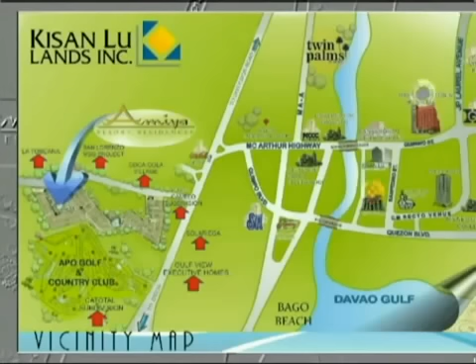This modern Asian, specifically a Thai-themed community, is only a 20-minute ride from the downtown area. This is almost in front of other subdivisions and near commercial establishments like Davao City Hall, health center, public and private schools, public market, malls, beach resort, and of course, the Apo Golf and Country Club.

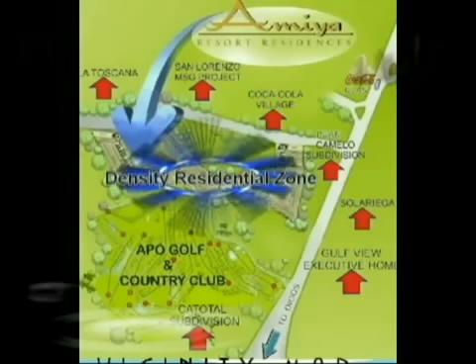Study shows that this property is classified as a protected low-density residential zone and shall be used principally for housing purposes, with a dwelling density of 20 units per hectare, provided with primary and secondary wastewater treatment facility.

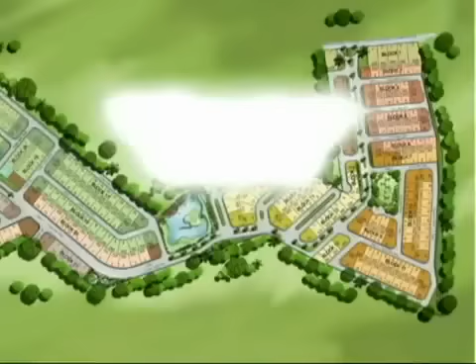Amiya Resort Residences offers open lots with a minimum lot area of 200 square meters, a total of 455 saleable lots, which is 52.88% of the total project area of 239,086 square meters. Reserved an area of 12,280 square meters easement for future use.

For the utilities, the Davao City Water District has certified the company, showing their support for the subdivision's water supply, as well as the Davao Light and Power Company for electrical supply.

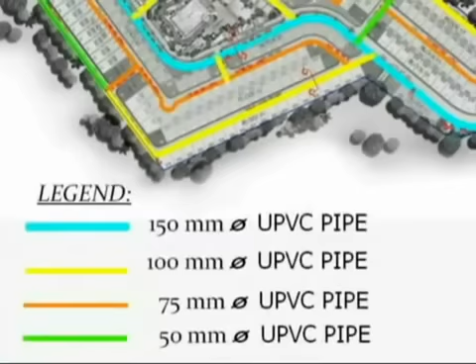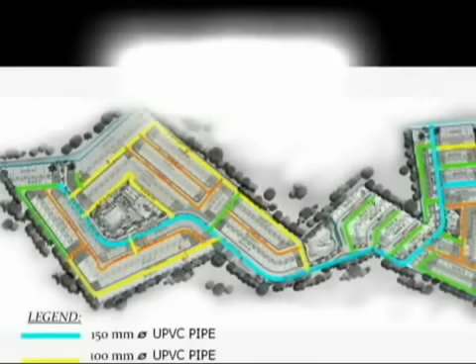Water supply by DCWD will be channeled through the water line system using 150 mm diameter UPVC pipe as main line and 100 mm diameter to 50 mm diameter UPVC pipe as tributary lines. Water distribution layout plan is based on the minimum standard set by the Davao City Water District and/or the local water utility administration.

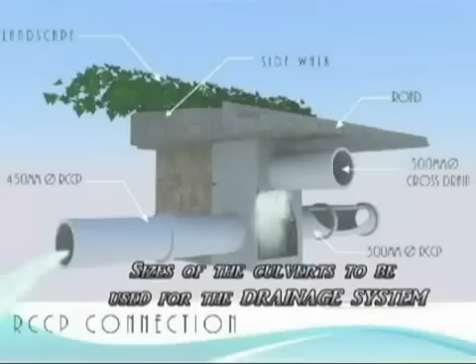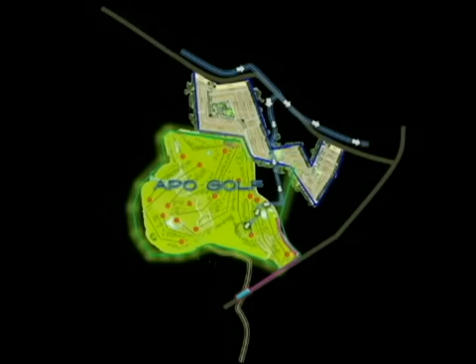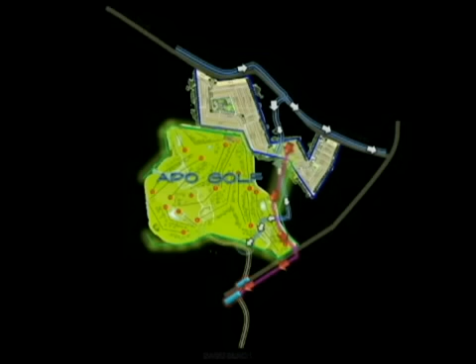There is an existing natural waterway that traverses the property. It passes through Apo Golf and Country Club and eventually to the ultimate outfall, which is the Bago Creek. The company proposes to divert its storm and drainage system, or 44% of the water flow, within the drainage catchment area to the existing 48-inch culvert of the DPWH.

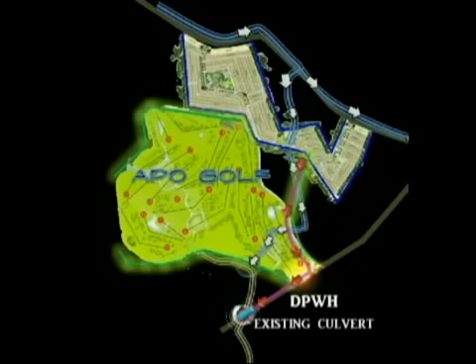We will install a 48-inch culvert on the boundaries of the property of Apo Golf and Country Club, along the prevailing road of Apo Golf and Country Club, and eventually tapping it to the city's existing 48-inch culvert along the National Highway. The existing 48-inch culvert of the DPWH will ultimately fall to Bago Creek.

Permit to tap the 48-inch existing drainage line along MacArthur Highway has already been secured by the DPWH with the approval of the City Engineer's Office.

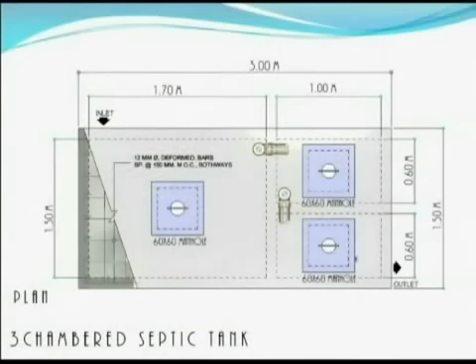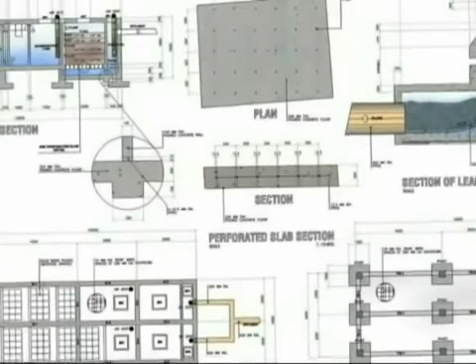The Department of Health has released an initial sanitary permit to the company for the construction of a public sewerage treatment facility. We have reinforced concrete septic tanks, bottom sealed and waterproofed to prevent seepage and leaks, and to ensure non-contamination. The project proposed 2 units of wastewater treatment facility.

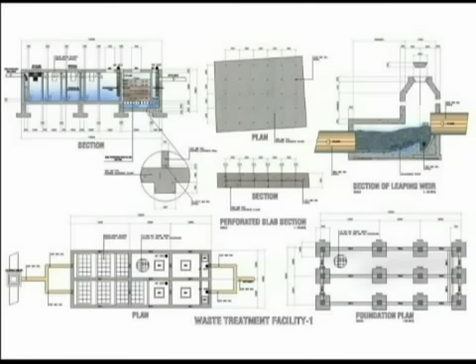The wastewater treatment facility, or specifically the anaerobic baffled reactor treatment facility, is a multi-chamber tank that holds the process of removing contaminants from the pre-treated influent. Its objective is to produce a waste stream and solid waste or sludge suitable for discharge.

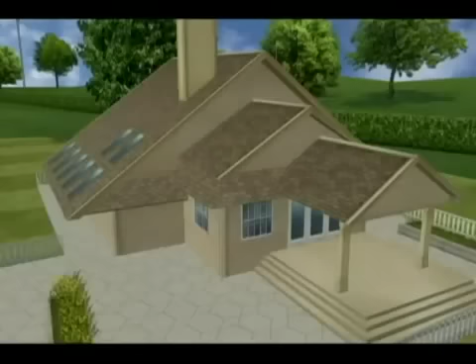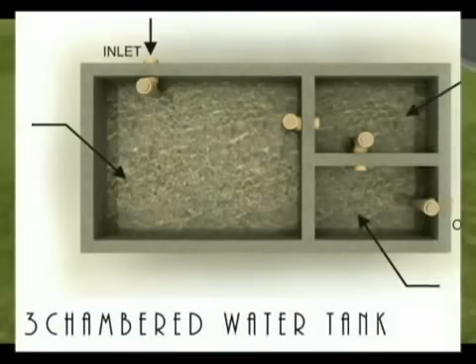The process. First, the domestic sewage or wastewater coming from the household will be received by a 3-chambered septic tank. Second, the sewage will enter the main chamber of the digestive chamber. Due to the absence of a current, the sludge quickly settles down to the floor of the digestive chamber. Anaerobic bacterial digestive activity leads to the generation of methane and carbon dioxide, which stabilizes the sludge so it does not rot anymore.

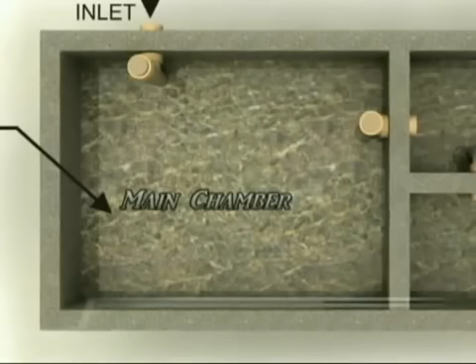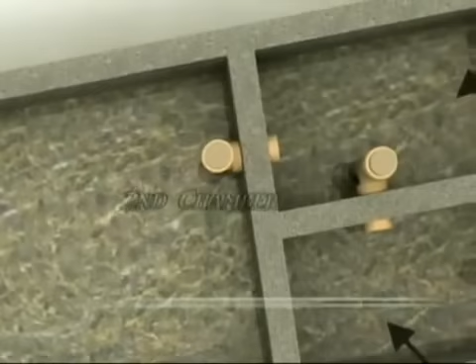Third, the semi-purified water moves to the second chamber via the overflows that are constructed such that the upward motion of water prevents larger particles from flowing into the second chamber. The feeding, digestion, and settlement of organic matter continues in the second chamber.

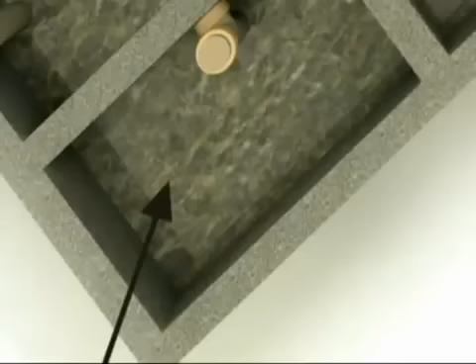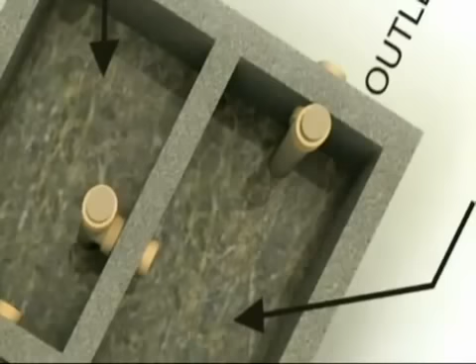Fourth, the water comes into the third chamber, where the feeding, digestion, and settlement of the organic matter, if it still exists, will continue. And finally, the clear water coming out from the 3-chambered septic tank is channeled to the wastewater treatment facilities through drainage pipes and manholes.

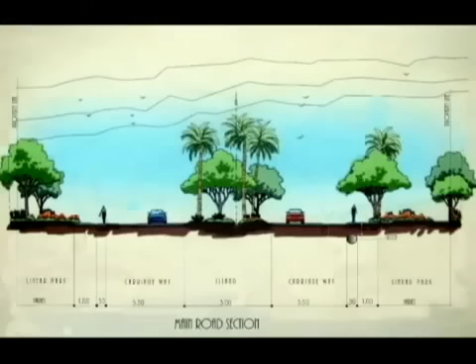All roads will be composed of load-bearing concrete with a 3,000 pounds per square inch strength and 6 inches or 15 centimeters thickness. 12-meter wide road right-of-way for the main road and 10-meter wide for all auxiliary roads.

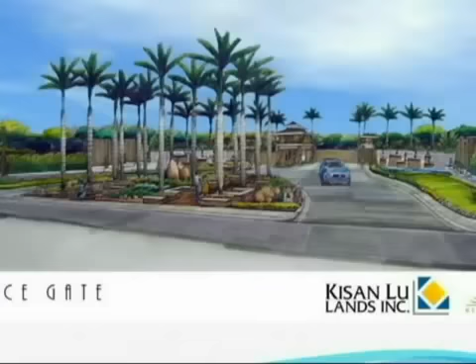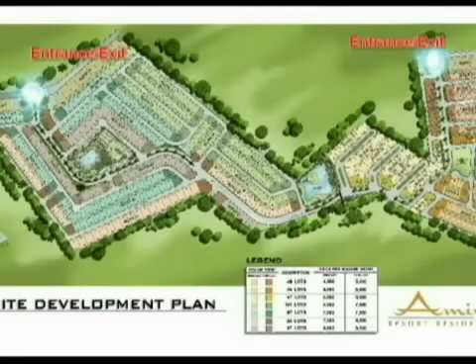The grand entrance will have a 50-meter wide opening with an easement of 27.5 meters from the Libby Road. There will be 2 access points to which 2 main gates will be constructed, intended for the entrance and exit ways. Both of these gates are located along Libby Road. The main entrance will be gated and will serve as the welcome landmark for the subdivision.

The guardhouse will regularly have a guard on duty who will control the entry to and egress from the subdivision. The grand entrance will adapt the modern Asian Thai theme to consistently express the motif and ambiance of the subdivision. The subdivision's name and logo will be reflected along the landscaped area. Heavy landscaping will be done in consistency with the theme and to promote a green environment.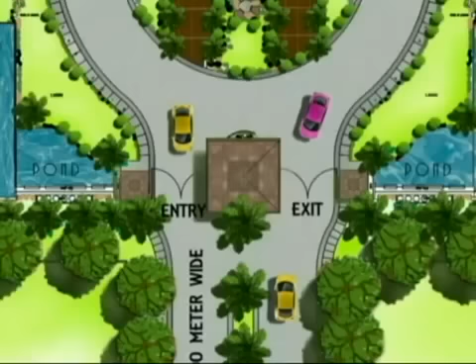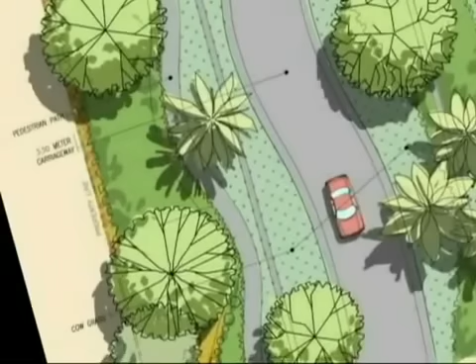It is a 17-meter wide main road. Along the main road is a 3-meter island and 1-meter sidewalks. The island will be landscaped and planted with trees. There will also be a 4-meter wide linear park beside the main road to reflect the concept of a resort feeling and cool ambiance and to promote greeneries.

The children's playground will have an area of approximately 1,000 square meters and consists of recreational and educational fixtures. It also has a wide activity area for the children. The area will be fully landscaped with trees to reflect a cool, serene, and relaxed environment.

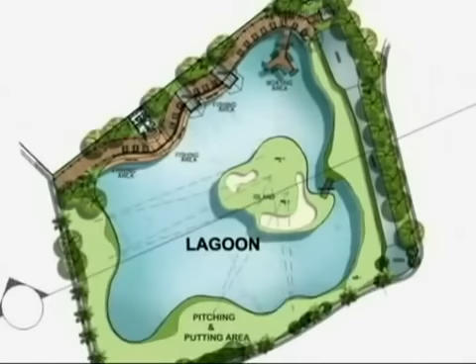The pond will be lined with the latest innovation to ensure non-seepage: the clay liner, better known as the Enviromat Geosynthetic Clay Liner. A 5,000 square meter fully landscaped area with huts, pond, and an island. The area will be abundantly planted with trees. The pond has an approximate measure of 3,500 square meters and has a depth of 1.2 meters to ensure the safety of the children.

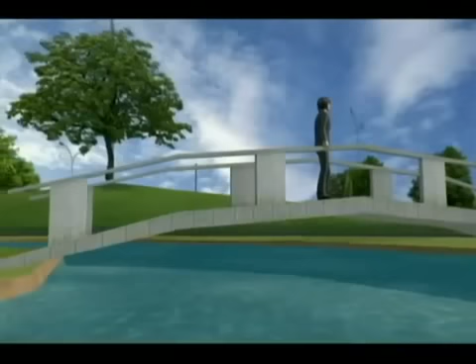An island will be built within the pond for pitching and putting. A bridge will also be put up. The area will be landscaped and specially designed for meditation, which will serve as the perfect place to relax, unwind, and restore the balance of body and mind.

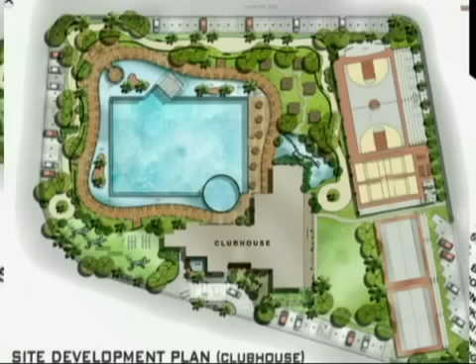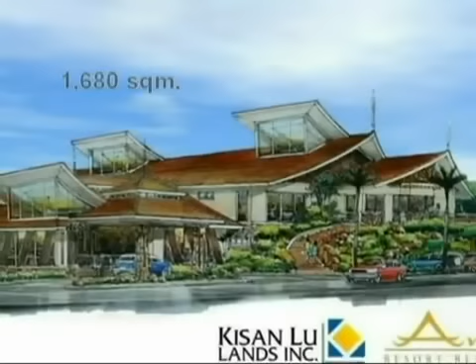This is going to be a 1.1 hectare area consisting of the main clubhouse, swimming pool, basketball court, badminton courts, tennis courts, gym, spa, casitas, restaurants, and a jogging path. The main clubhouse building has a total area of 1,680 square meters. The main clubhouse will also be inspired by the modern Asian theme, which is mainly composed of masonry with a touch of natural woods as accent.

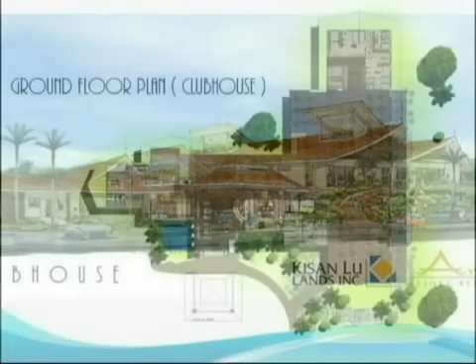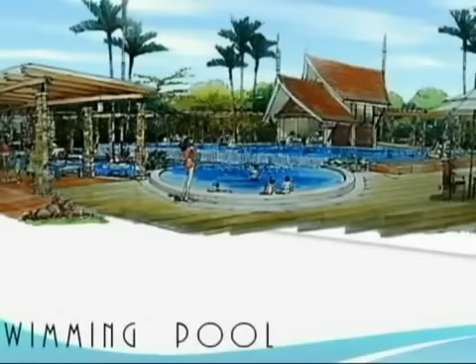The building will have a fitness gym and spa, game room, 2 function halls to hold special events, administration's office, a lobby, dining hall, and a kitchen. This swimming pool is salt chlorinated to protect the skin, measuring 1,500 square meters. It is surrounded by a pond, thus effecting infinity or a continuous visual effect to the pond. This is also called negative-edged or infinity-edged.

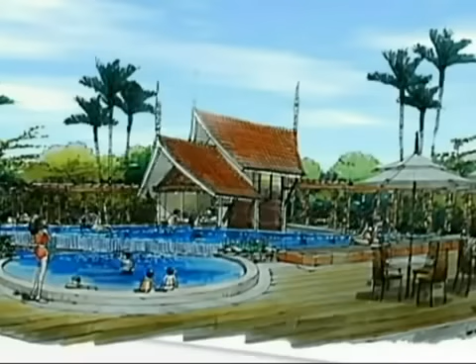A kiddie pool for children will be constructed beside the swimming pool. A view deck with trellis will surround the pool to serve as a shade for the swimmers. The pool will also feature a sunken bar. There will be pool pumps, shower and dressing rooms conveniently located near the pool. And casitas will also be provided to serve as cottages where the homeowners may house their guests. There will be a specially paved area around the clubhouse that will serve as a jogging path.

The perimeter fence will be 1.8 meters high and will use concrete hollow blocks as the primary material. The property will be fully fenced to ensure safety. Experience the true essence of resort living only at Amiya Resort Residences.